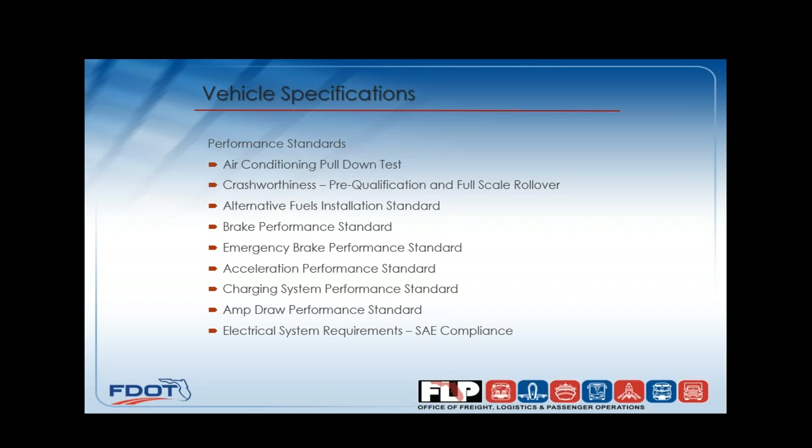Specification development. We began writing these performance-based specifications around the 2011 contract, to address concerns when specific components were named in contract specifications and failed to perform in a safe, reliable manner. It was also done to address specific items not addressed by federal or other industry standards. Performance-based specification gave manufacturers the ability to procure components and engineer construction methods based on the performance measures within the specifications without interrupting their normal processes.

When you do specific specifications that name specific items, it may be unfamiliar to a manufacturer, and that creates problems in quality and installation. So that's another reason why we went to performance-based specifications.

Part of that is chassis modifications. We don't say they can't cut the chassis, because there's available wheelbases for all the different length buses out there. But anything they do to that chassis has to be approved by the OEM manufacturer - Ford, Chevy, or Freightliner. They all have these processes in place that these second stage manufacturers should adhere to, and we verify that they adhere to it.

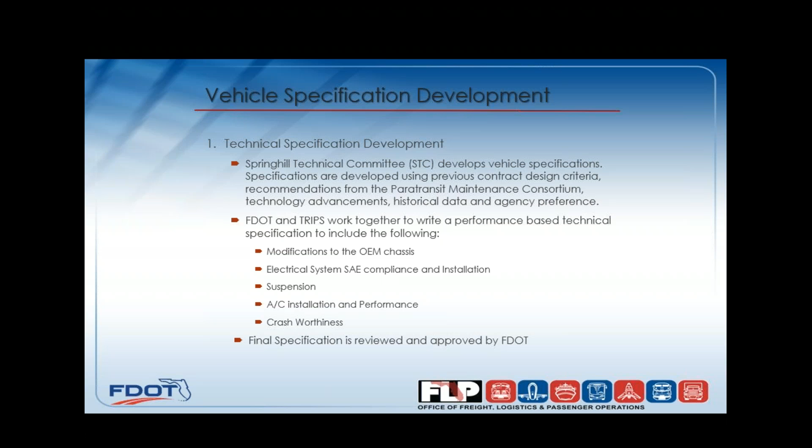I also want to note that performance-based specifications are only as good as the process to verify compliance. The FDOT continues to provide ideas and resources to lead to our success with this.

So... Nellie's moving ahead of me.

All right, the introduction to the crashworthiness program.

Florida's been conducting cutaway crashworthiness testing for more than 15 years. Springhill is the FDOT facility located on Springhill Road in Tallahassee, used as the headquarters for the TRIPS program. Every vehicle ordered through TRIPS passes through Springhill, where it's given a detailed final inspection. Crashworthiness testing is also primarily conducted at Springhill using a variety of test apparatuses designed and constructed by the crashworthiness and TRIPS programs.

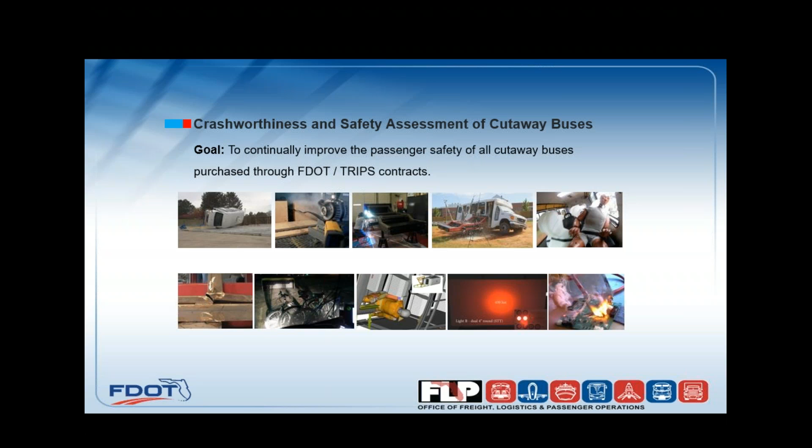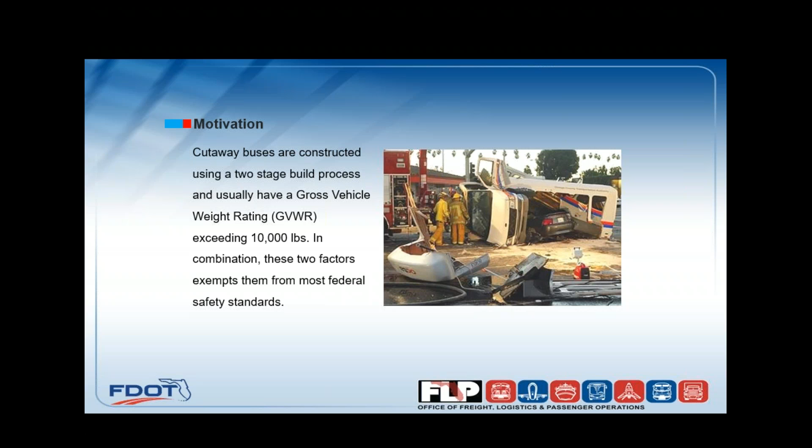This is an identical bus to the one in that previous picture. Keep in mind, as you can see, it was just a shell of a bus. It was not loaded, so the impact was not near what it could have been had it been completely loaded.

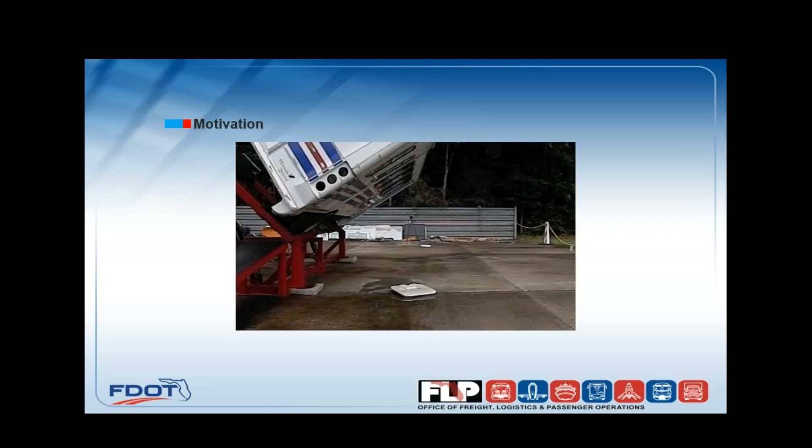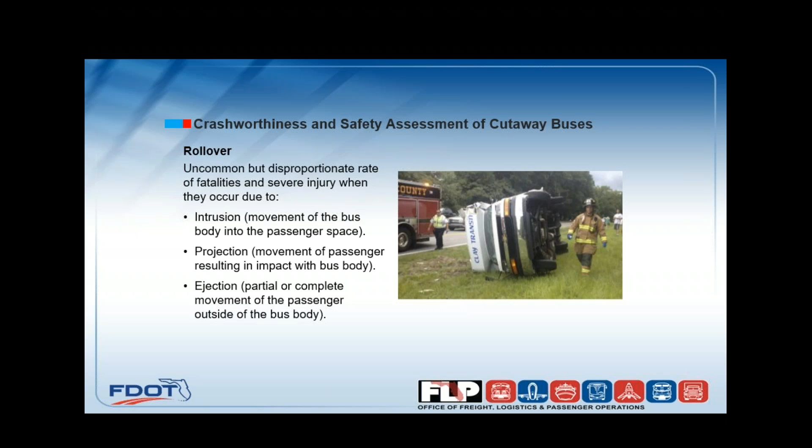Which is why we decided to move to the dynamic rollover test, which started with the first one we did, I think in 2009, an actual rollover.

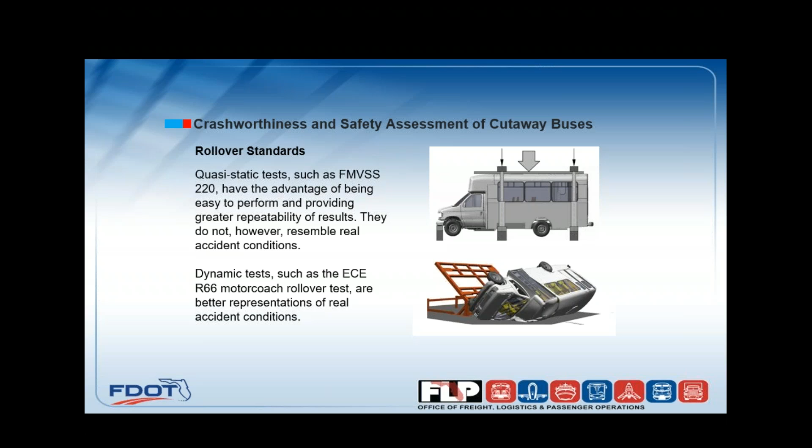An essential part of crashworthiness design effective in all types of crashes is a strong occupant safety cage. As you can see, the 220 is a good test if everything happens straight up and down, but in a dynamic situation, the sidewalls would be relatively weak. That all comes with the wall-to-floor and roof-to-wall connections that will see a lot of rotation in a dynamic rollover situation.

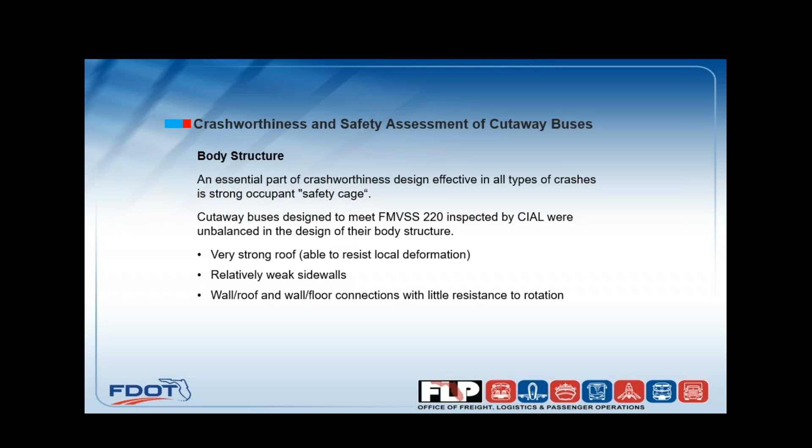The pre-qualification is something that we go through when we put out an RFP, or if somebody wants to become part of a future RFP. We have this pre-qual standard they must go through, and what we do, they have to complete this before we can entertain an award to them, or purchasing that type of vehicle.

Part of that, we do a drawing review, a frame evaluation, and then we request an entire bus cage that we cut sections out of, and do actual testing of a wall-to-floor section, a roof-to-wall section, and a complete sidewall section. There are minimum standards they have to meet in order to be approved to move forward. Then the next phase of crashworthiness is the actual Florida standard, the full rollover that we do on our tilt table.

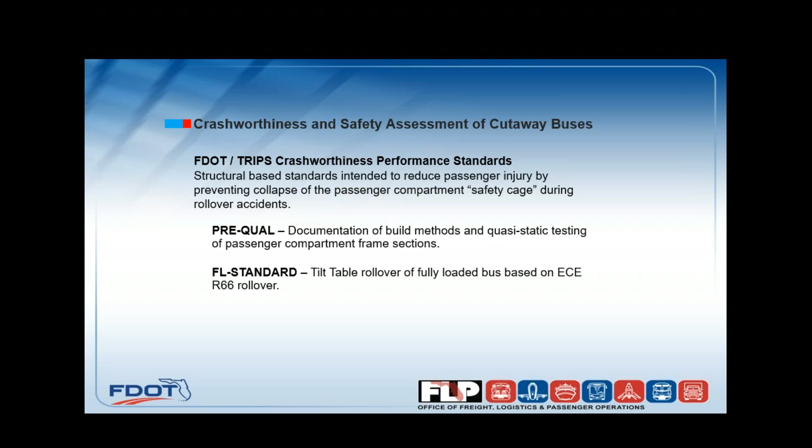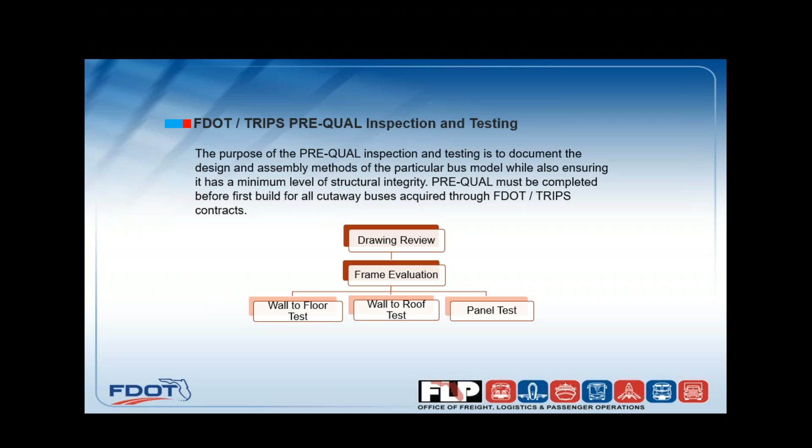Am I muted? You're good. Next slide. Okay, yeah, next slide, please.

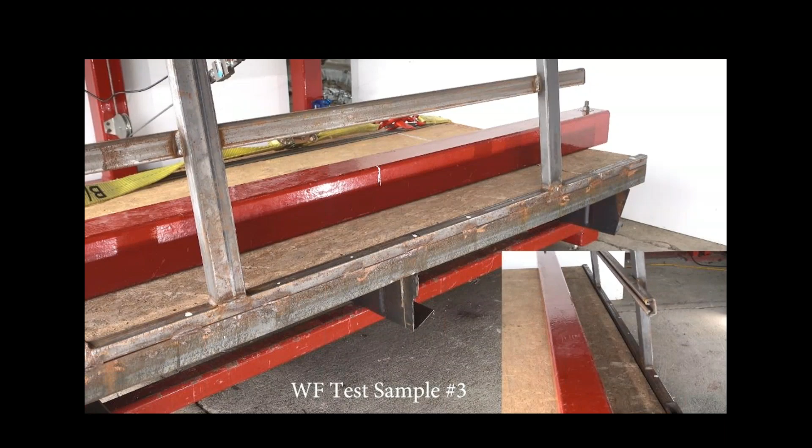Will you play this video? This is a video of an actual floor-to-wall test we're performing. What we're doing is measuring the amount of energy this panel will absorb over a period of rotation. By doing this, we get a better understanding, and we can eliminate weak connections, poor designs, materials, and things like that.

We're not out to change what manufacturers are doing. We're only out to enhance what they're currently doing.

So next slide, please.

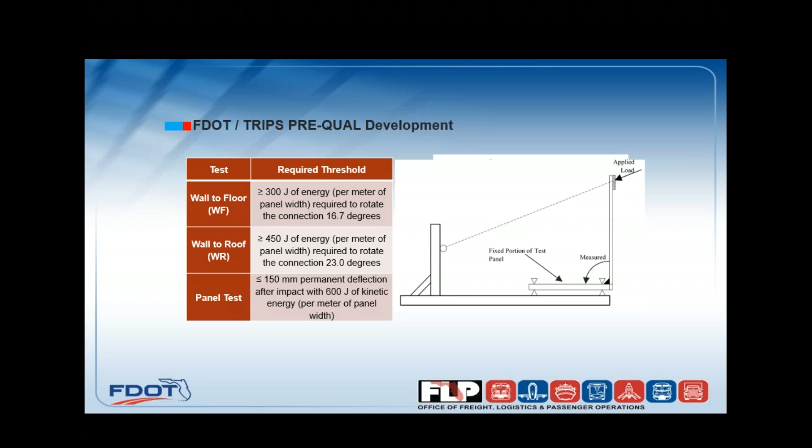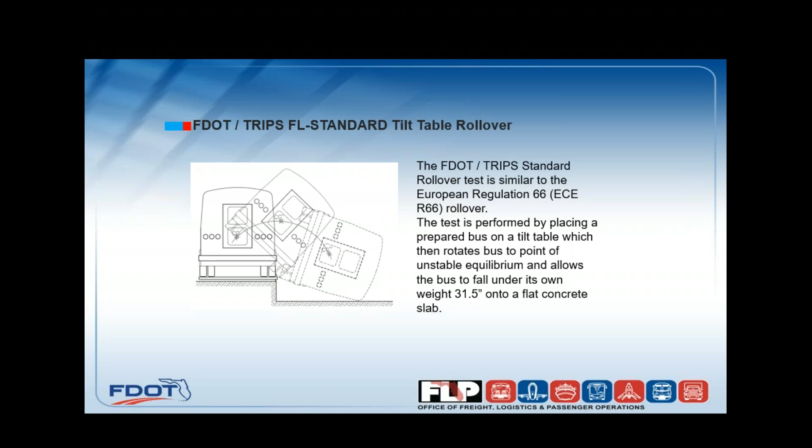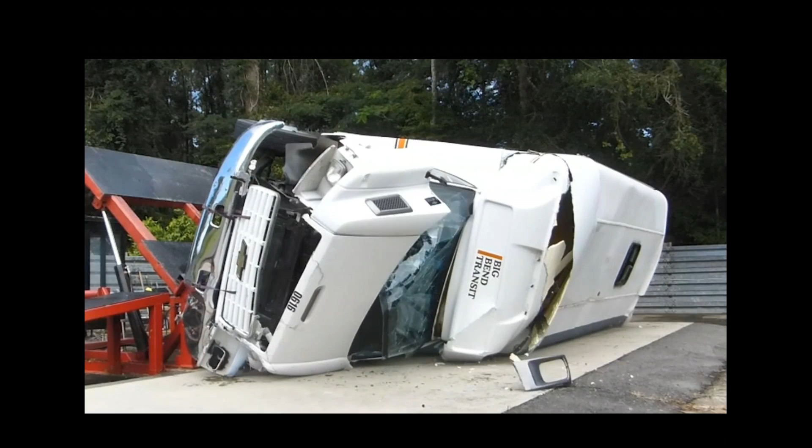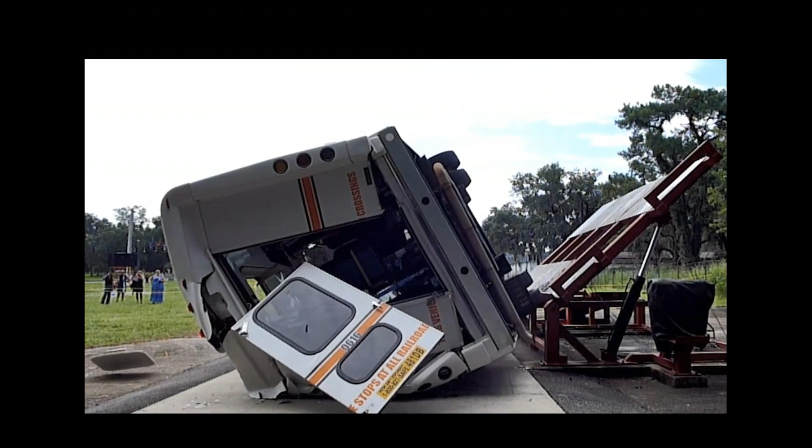This test is of a bus that was pre-rollover standard. As you can see with the emergency door flying out and the amount of deformation, that's not ideal.

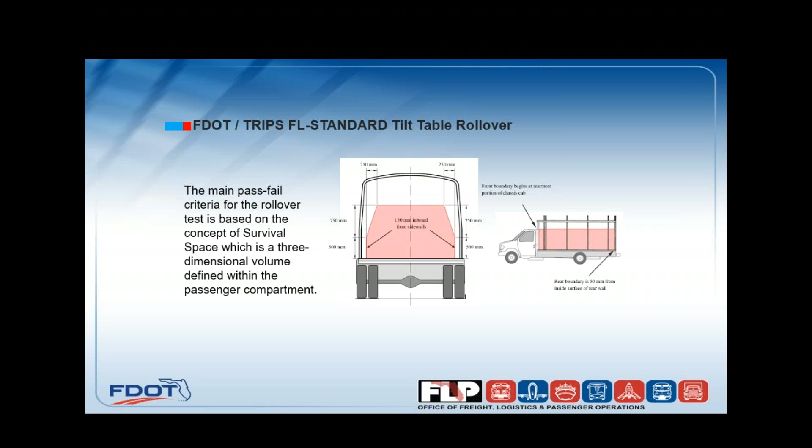This just shows what we call the survival space. As you can see, it's about 6 inches from the wall at the floor, and as it goes up, it just maintains, it goes in. So in a rollover situation, nothing can intrude into this space.

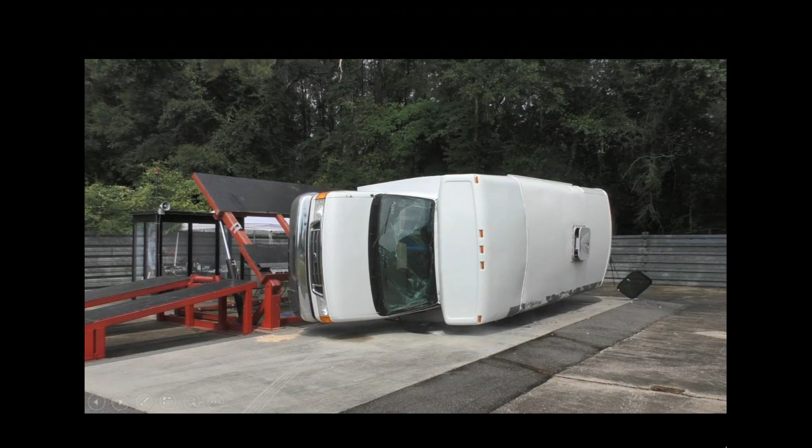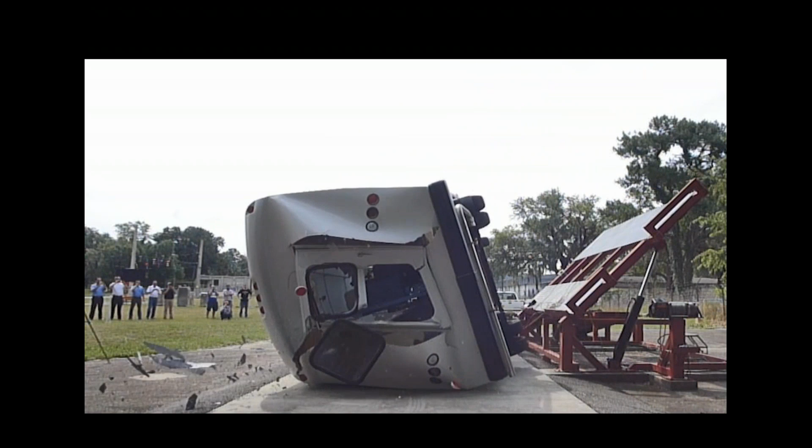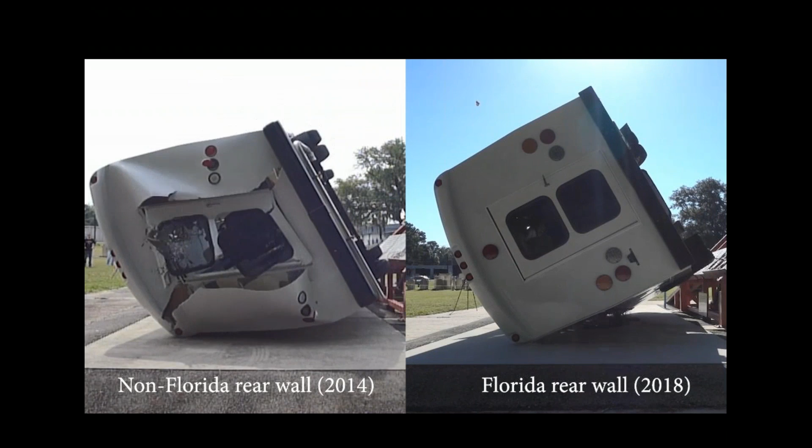This is a bus that had a very strong front section but a weak rear wall, and it did not meet the rollover standard. The only difference between these two buses here is the strength of the rear wall.

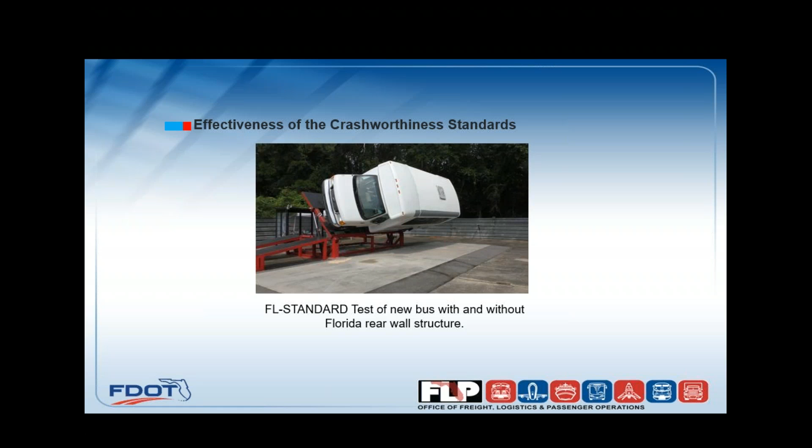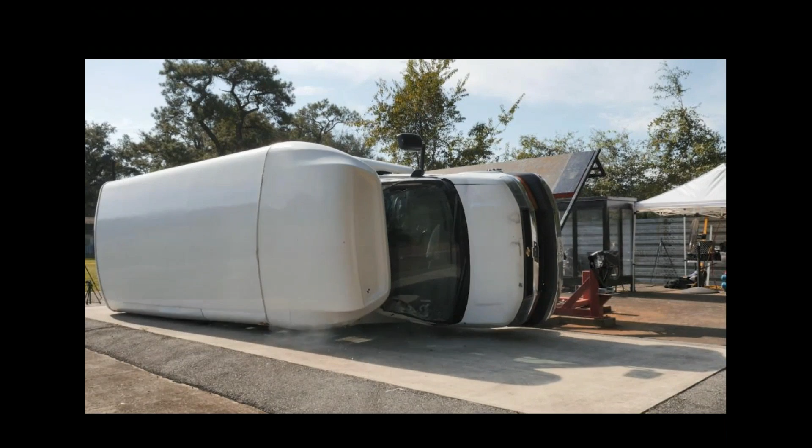The cage of this bus performed well. However, it had an actual seat detached from the wall, which is something that can't happen in order to meet our standard.

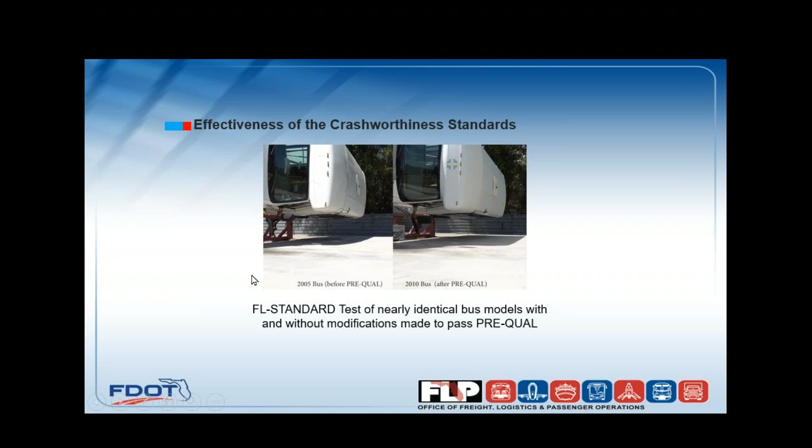Go ahead and play these videos.

As you can see, this bus went through pre-qual testing and made improvements to their cage design based on pre-qual. This bus did not. You can see, just based on pre-qual testing changes, the difference in performance.

We partnered with CAPE Engineering out of Indianapolis, Indiana, part of the IMMI Corporation that does seat belts and seats for school buses. The intention of this test is to further evaluate passenger injury based on seat belt design, 2-point versus 3-point, and unbelted. We did a dolly rollover with instrumented dummies to gain information, and then we also did a rollover in the same seat configuration off of our tilt table in order to compare the differences in passenger injury.

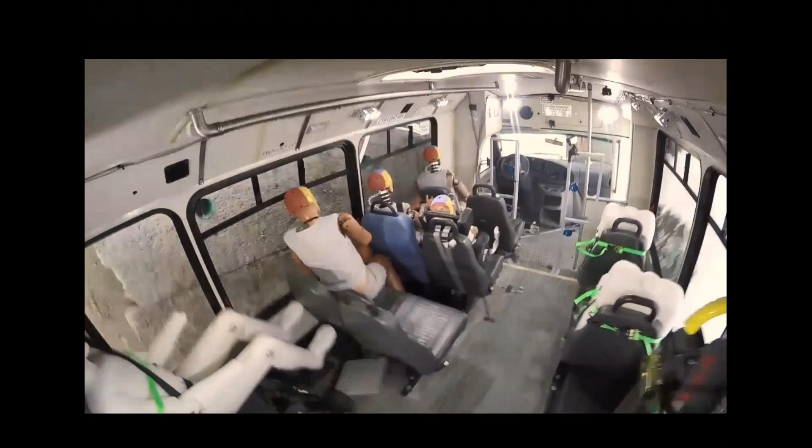That's a good visual of the difference between the types of seat belts and no seat belt use at all. You see how much movement there is in a dynamic situation.

Next slide. Okay, I'm going to talk about Altoona reports and trying to get the most out of it. It is required when you're using federal funds to have this test documentation, so we might as well get something out of it. It was centered around determining useful life standards for transit buses.

They recently changed to a pass-fail test, which is calculated on the amount of downtime over the test period. Any bus with less than 125 hours of downtime will receive a passing score.

However, there's additional information contained within that report that can assist transit agencies in projecting maintenance and operational costs over the life of the bus. Projected operational fuel costs can be calculated based on the fuel economy test performed in simulated transit drive cycles. They use different style routes to calculate that fuel mileage, which you can use in turn to know what it costs you fuel-wise over a period of time.